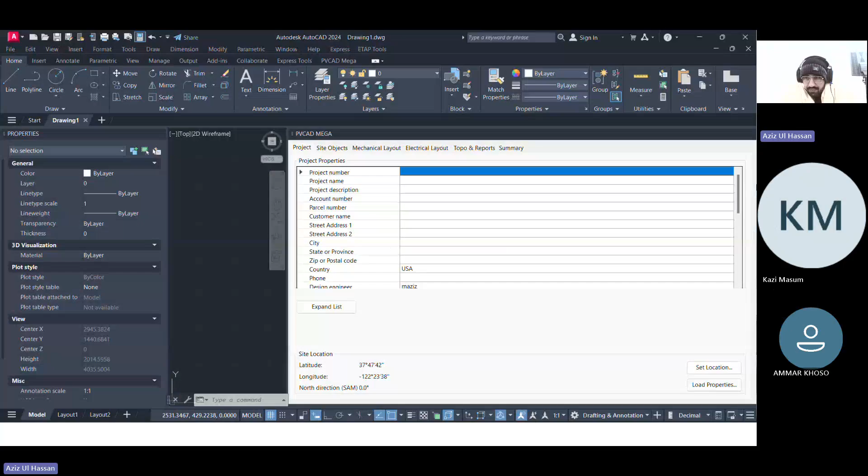So, starting our lecture, I'm sharing my screen. That is the new file. First of all, I am going to the file and saving that file.

Now first of all we set up our units. We are setting the unit in meters, decimal, 2 digits, and then we press OK.

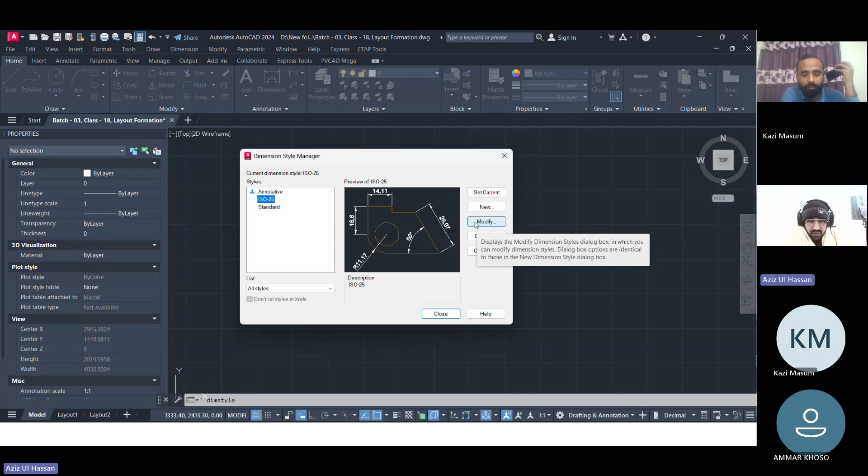Then we set up the text modification standards. If we do these modifications, the text height should be 2.5 standard text size. We are going to set Arial height to 2.5, and then apply that. The arrow should also be 2.5, then close this height setting. So I'm pressing okay.

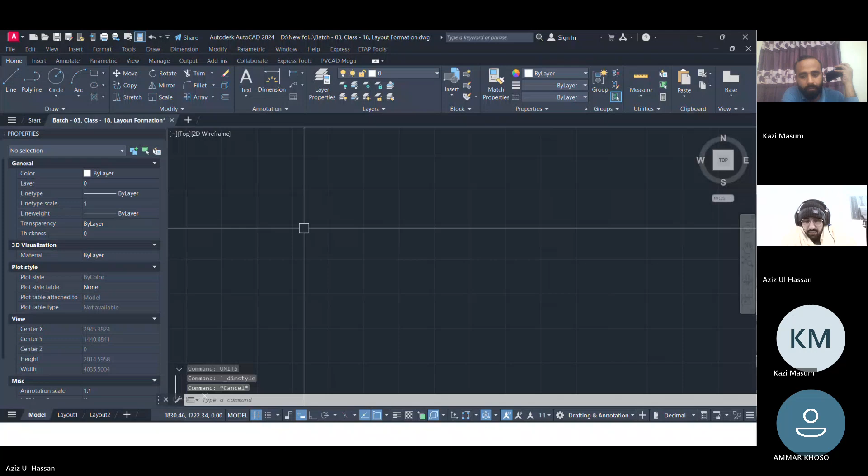Now I have just marked a layout, like here, like here. Basically, just moving that one right there. Now we will make a proper layout in that closed boundary.

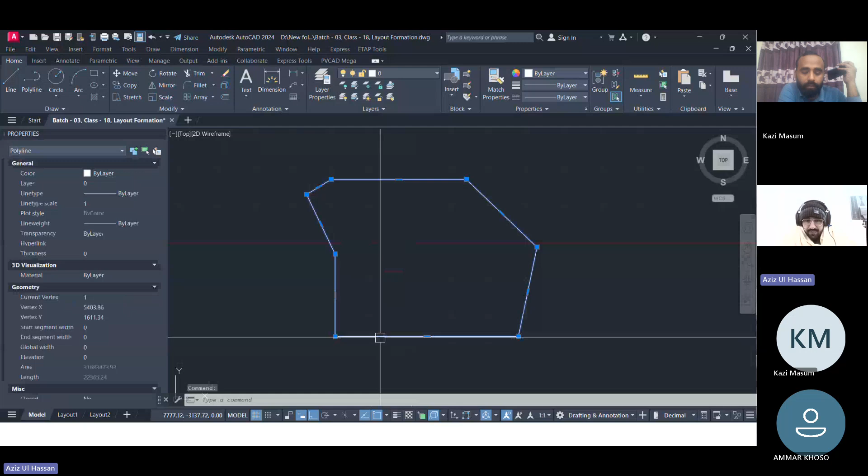So first of all, we have to give the offset for that working. We give them a 10-meter offset. Let's use DLI, DAL for that. DLI. It should be 10, okay.

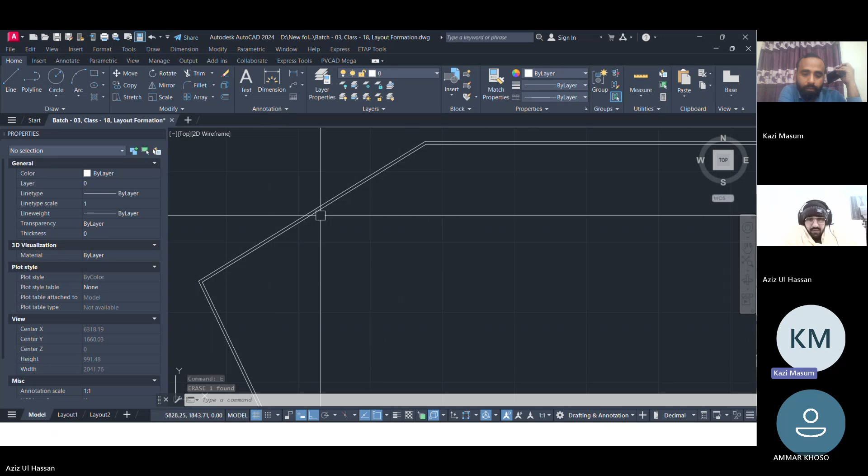Now first of all we give them an offset of 15 meters for safety purposes. Now we are making a panel, rectangular rectangle.

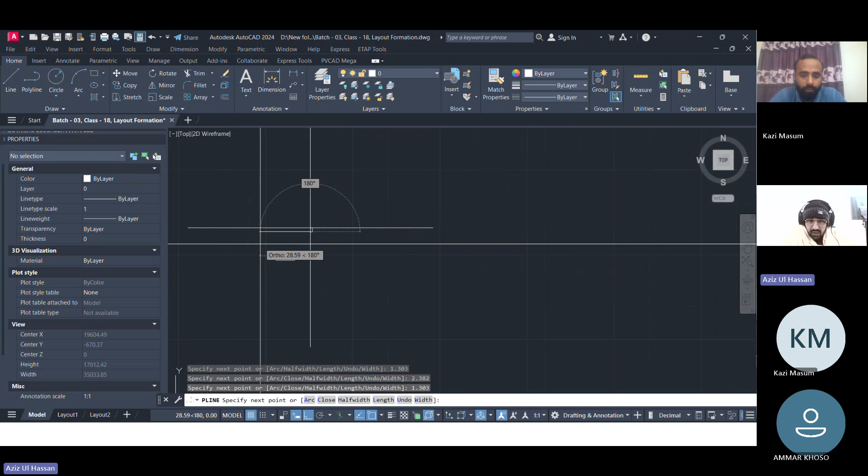I just want to check one drawing unit. So we are making a layout, sorry, one panel. First of all, width should be 1.303, and length should be 2.382 meters, same 1.303, and then I have to close that one.

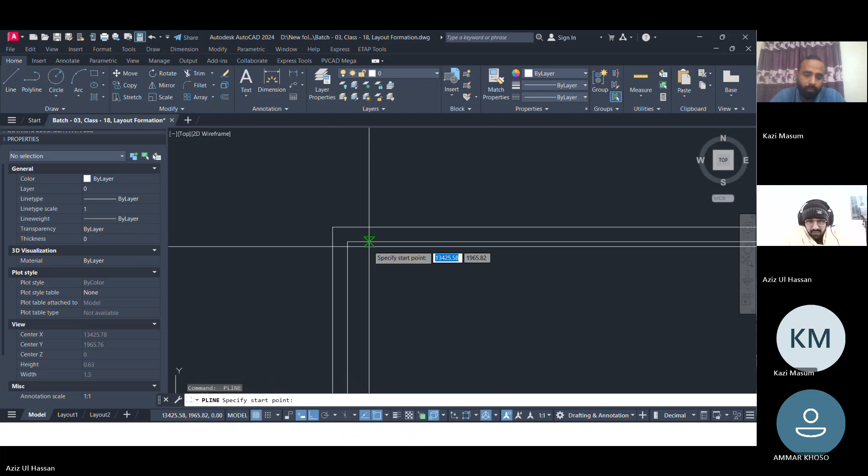Now I'm giving them the offset of the thickness. Thickness is 33mm, so 0.033 offset. Placing that one, and then this one.

Now I'm making a block, PV module, 715 watt. Select object, okay.

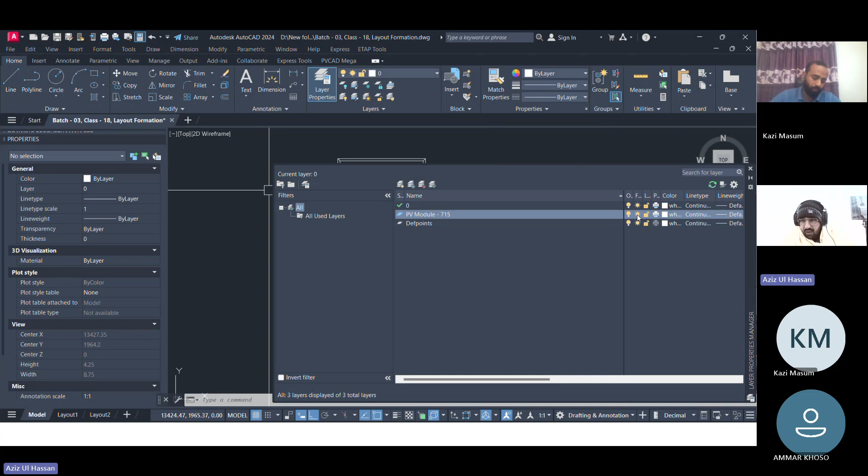Now you have to make a layer for that one. First of all, you have to make the layer. This is the new option for a new layer. You just create a new layer, PV module. Basically when working in the layer, when you uncheck that one, the whole PV modules or anything in the same layer, it should be like this. Just give them 150.

So here I just select that layer and then we have created that one.

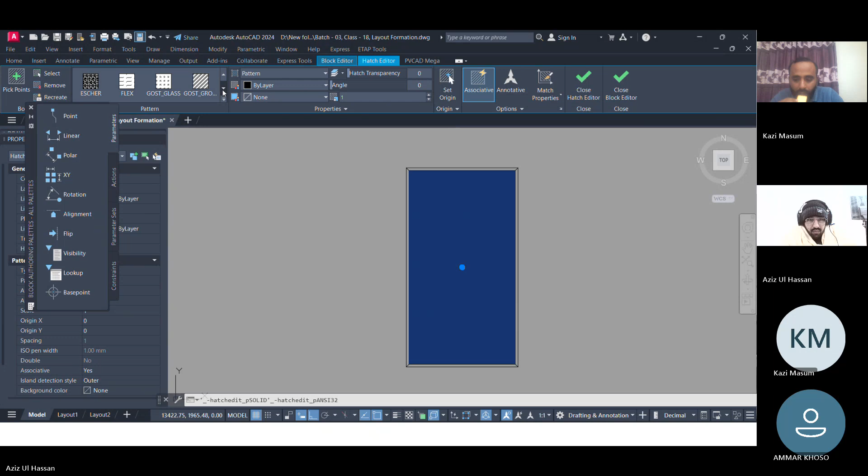But I want to give them the hatch under that one. This is the hatch, 5. It should be like 0.00. No, no, we have to increase that one. Okay, it should be like 50, 10.

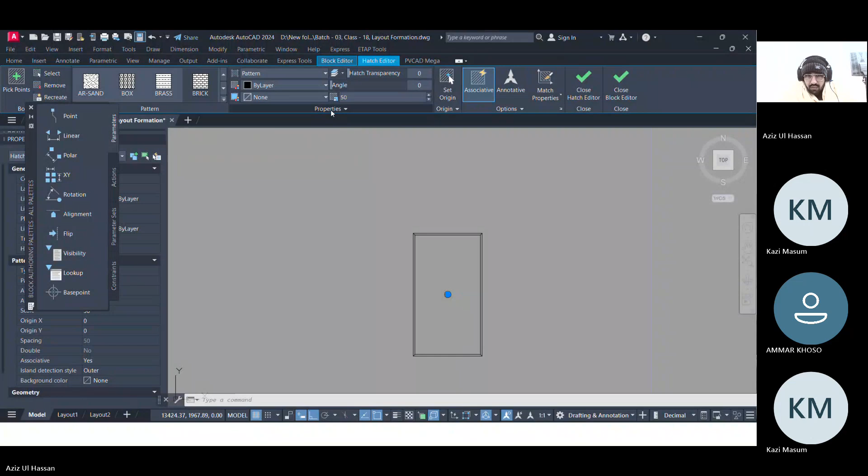Where is the hatch? No, it should be 0.01 like this one, or it should be 0.06. Okay. So we are just selecting the layer under that one and close. Okay, now it's become the panels.

Now we are moving that panel.

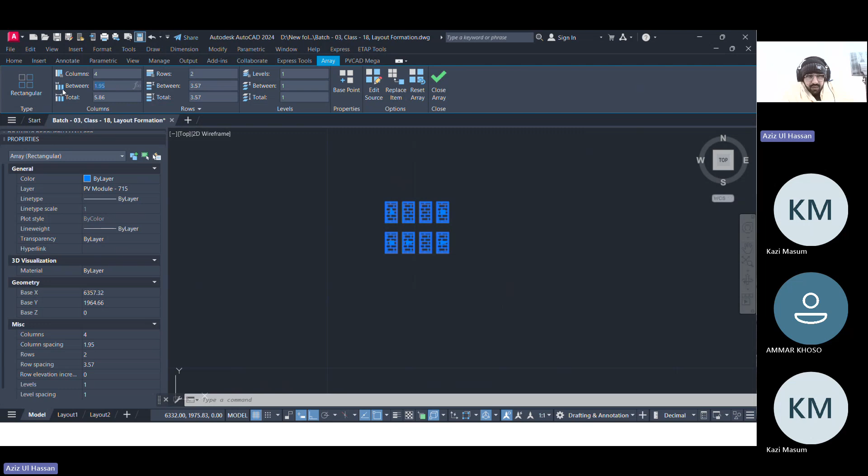So we have to make the array command, rectangular array. Here we just give them the two rows. This becomes 1.329, and this becomes 2.382 plus 0.026, which is 2.408.

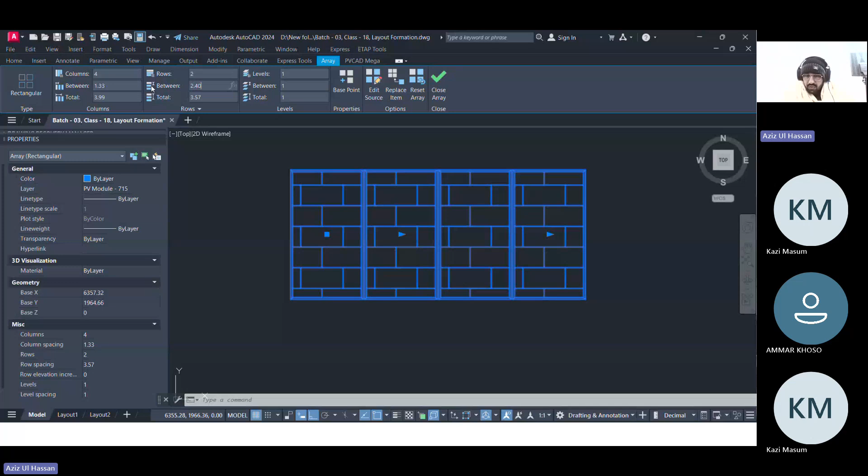Okay, now it's become full structure. So we are making a layout of 28 strings structure. What is the length of that one? Too much small. Yes, 5 point.

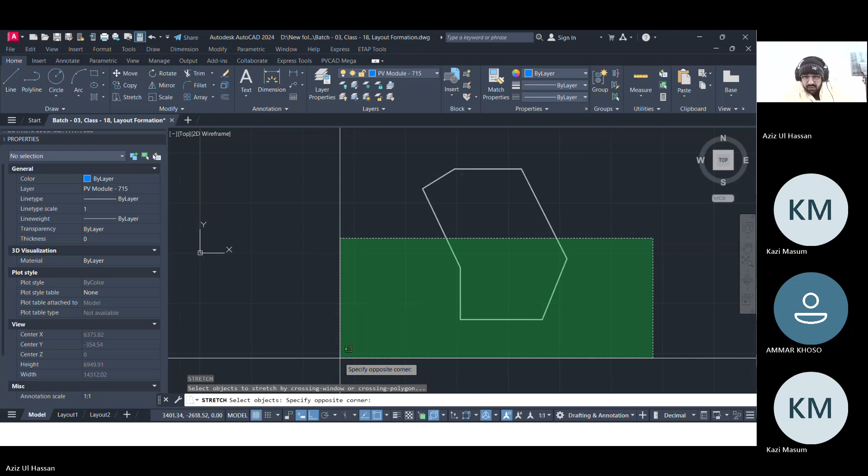So we just have to stretch that area here, and then stretch that area because as a practice, we are using that one. So that is why I just want to. Okay, now it's okay, it's too much.

So it's 28 PV modules: 3, 4, 5, 6, 8, 9, 10, 11, 12, 13, 14, 15, 16, 17, 18. Okay, now it's 28 PV module structure. So we have to place that structure like here.

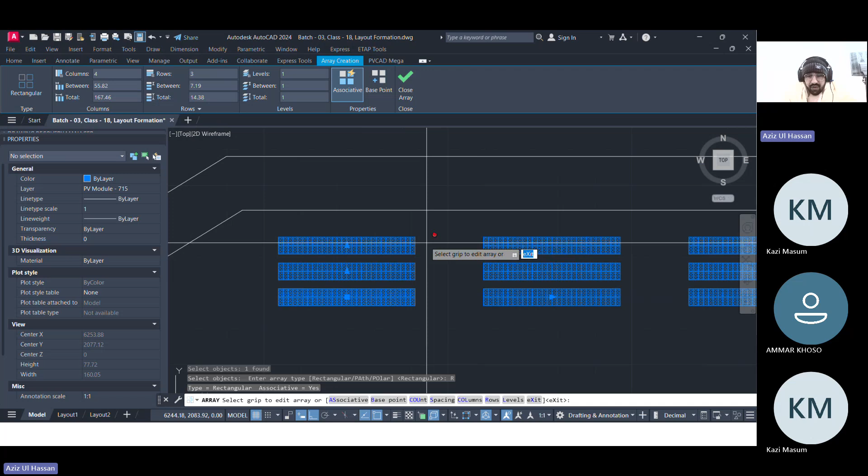Now we have to make an array, rectangular. First of all, we have to save that one because maybe in array our computer will... sorry, rectangular. Now I'm just giving in between. First of all, I need that length from this edge because we are...

37.21 meter plus 1 meter, 38.21. And we just give them this length should be 38.21, and this should be minus 10.

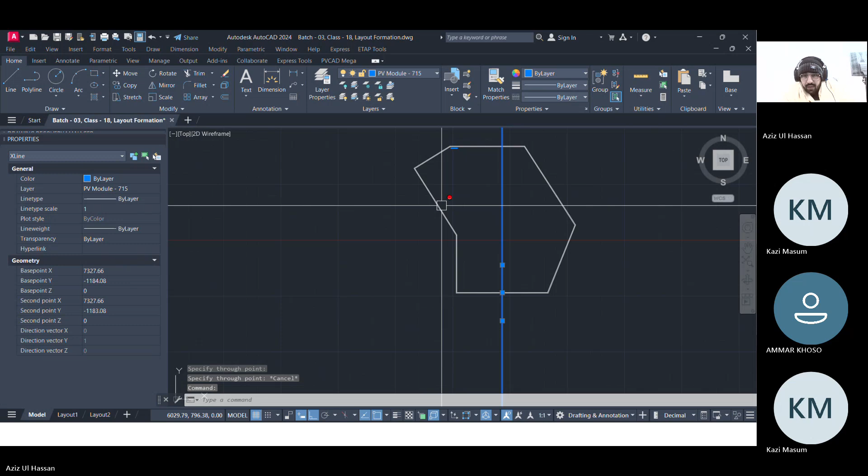Okay, so here we have to give them the road. We are XLine vertical, we are just here. We have one road, so offset we give them like 10 meter for the road purpose.

And then we are making some road like here and some here. Okay, here I just give them the offset of 21 meter, and same like that one.

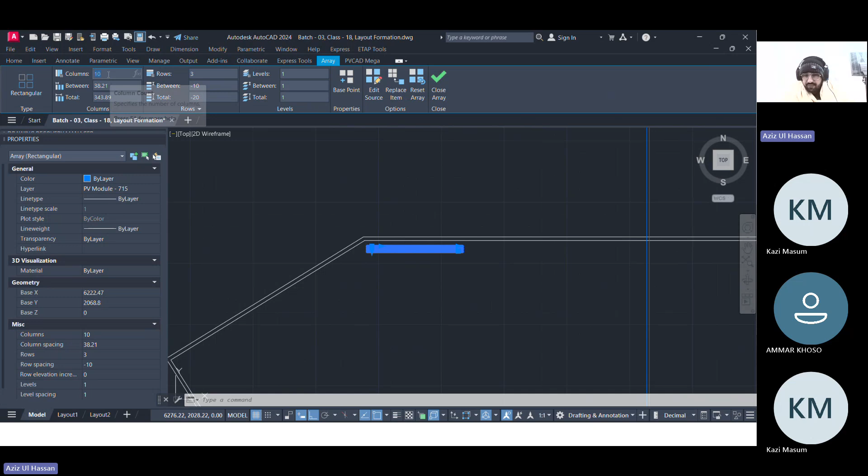Now I'm just placing that panels, and I just give them this row around 4, 5, 10, 15, 20, 30, no, 28. Okay, 28s are okay. 29, 29 is okay I think. Okay, 29 are okay.

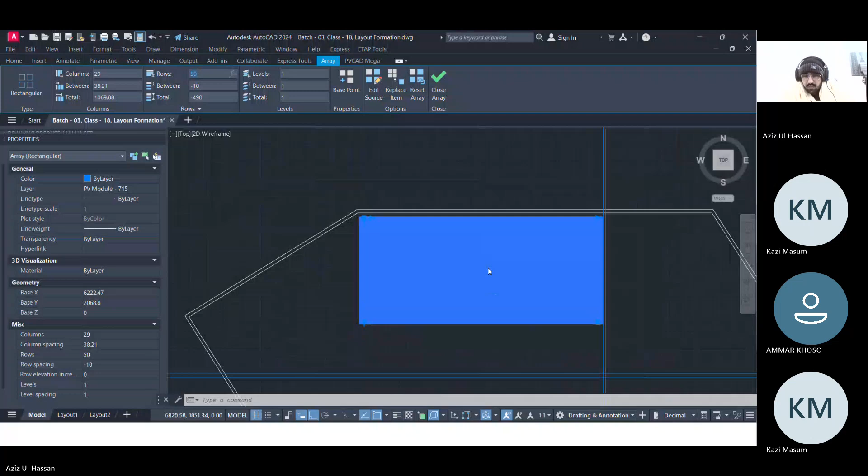So now we just explode that because they are creating too much issue. That is why I have exploded that one. Okay, now it's okay, basically.

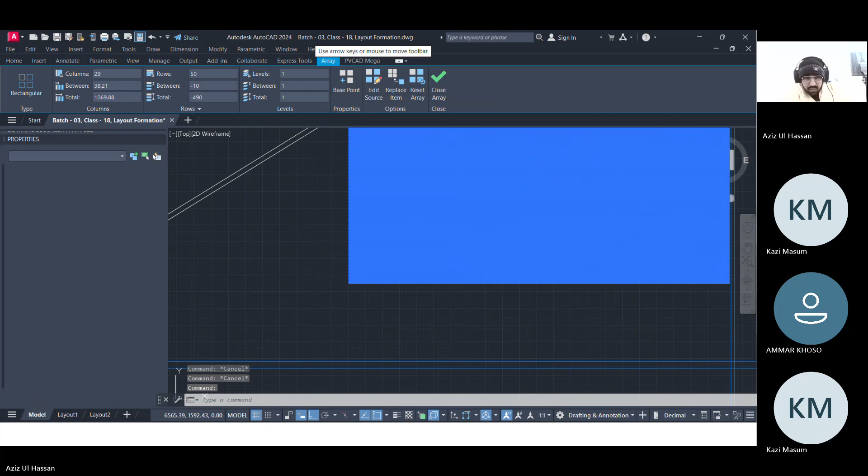Now I'm just copying that one like here. Here you can see that we have created a proper layout.

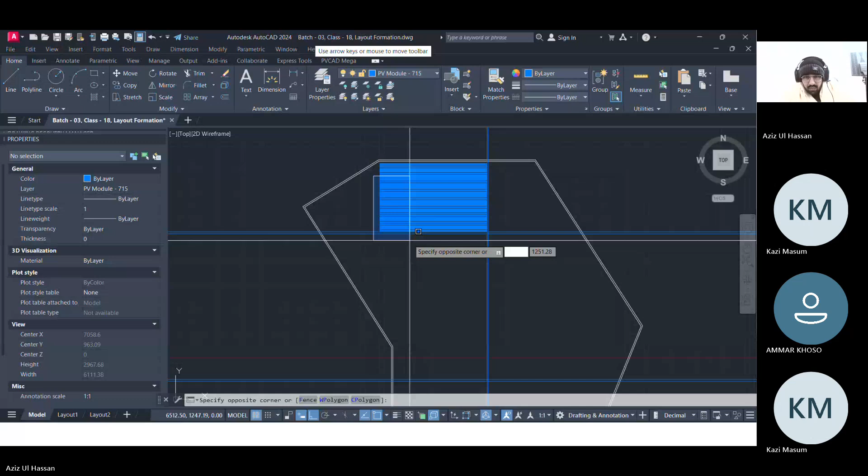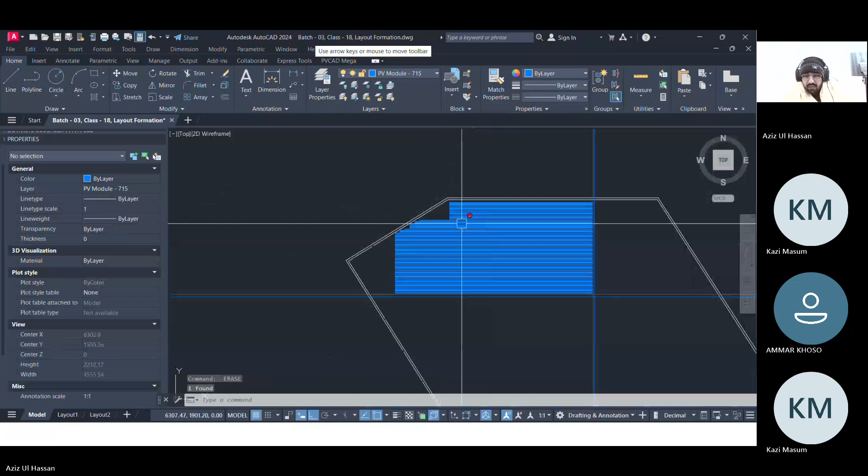Mr. Kazi, have you used PVcase before? No, sir. Kindly try that, it's very good software. Okay. Sorry sir, I missed your voice. I'm saying kindly try that in civil prospective, PVcase. Okay sir. It's very good for the civil prospective. Okay sir, it is a paid one, but as a businessman you can purchase the crack version. Okay sir, because you are the businessman. Sir, all businessmen are not rich. Inshallah, one day you will become rich. Inshallah, sir. Inshallah.

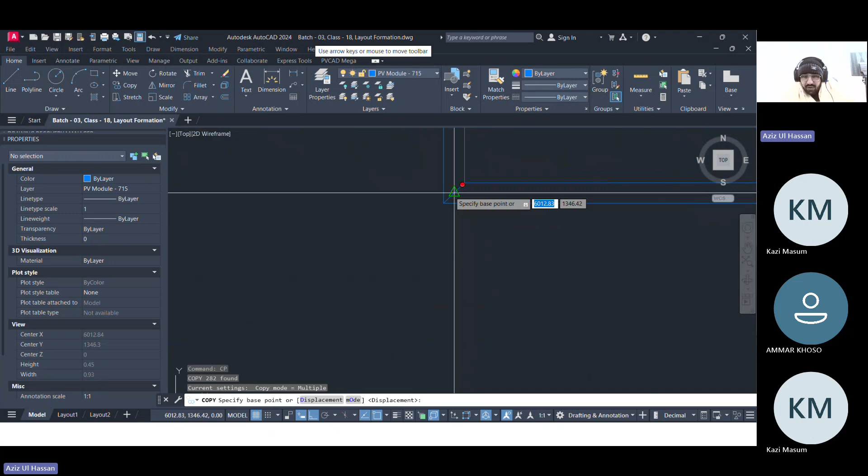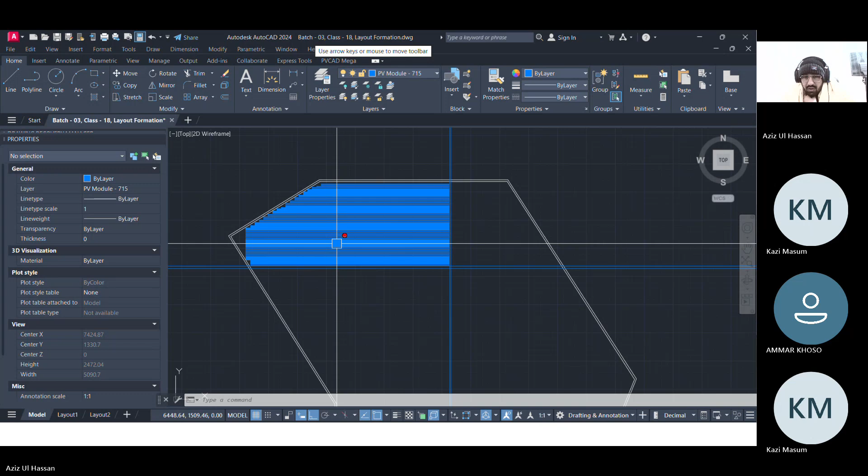How much project have you won right now in civil? We are working in small scale projects normally, these are 10 kilo, 20 kilo, 14 kilo. At the start of the project it is very good, meaning at the start of the company it is very good, yes sir. Actually in our country there is a government rule that to install any kind of utility or large buildings, it is mandatory to install solar panels. Okay okay, that's great. So in your company, solar has a very good future right now. We don't know, it will depend. Many things depend on the political situation. Ah yes, you are right, yes you are right. It is very too much unknown situation right now in different countries and scenarios.

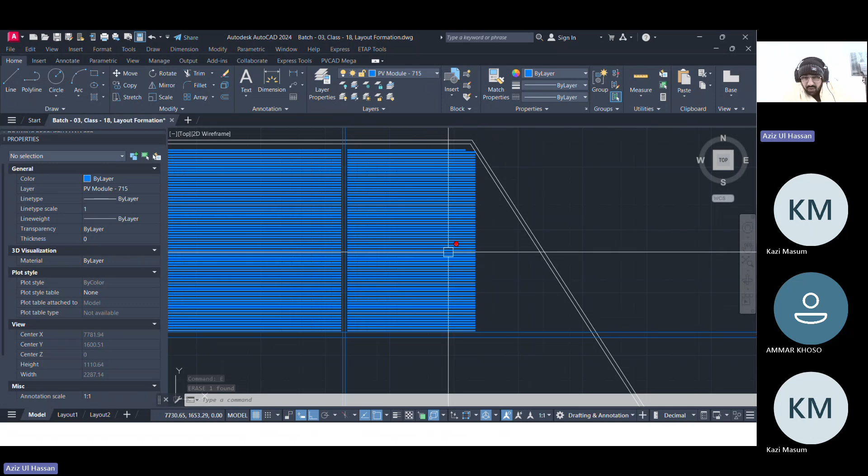So I'm just copying that file, because I can use the array command as a reference, but this project is too much large, and they are creating issues because in my computer the C drive is almost full due to some data. That is why it is creating issues in my laptop. So just for the understanding purpose, and to show you how we will prepare a proper layout, I'm just copying that one.

Sir, will you please show how we can calculate the DC cable lengths from this? Yes, yes, DC I will show. I will show, no issue.

I will show everything, brother. No issue.

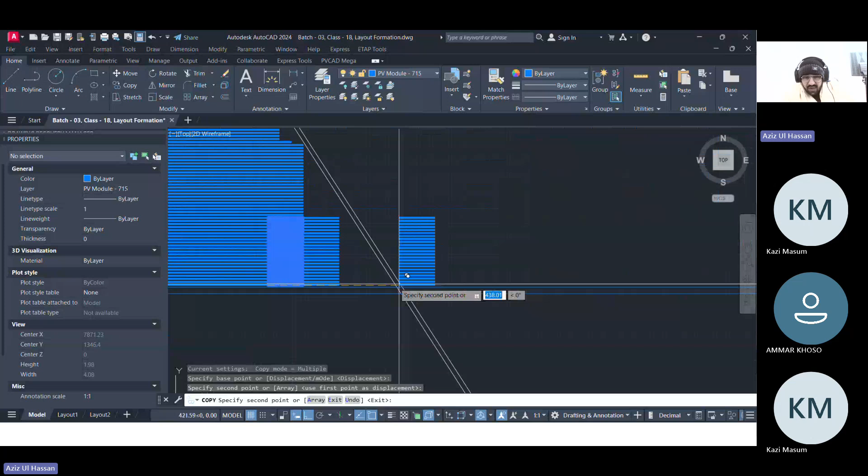Mr. Kazi, are you satisfied with this course? Obviously, sir, it's out of my section actually.

That is a very good sign for me, because when the client or the student is satisfied with your services, that means you are doing the right things. So you should continue the course.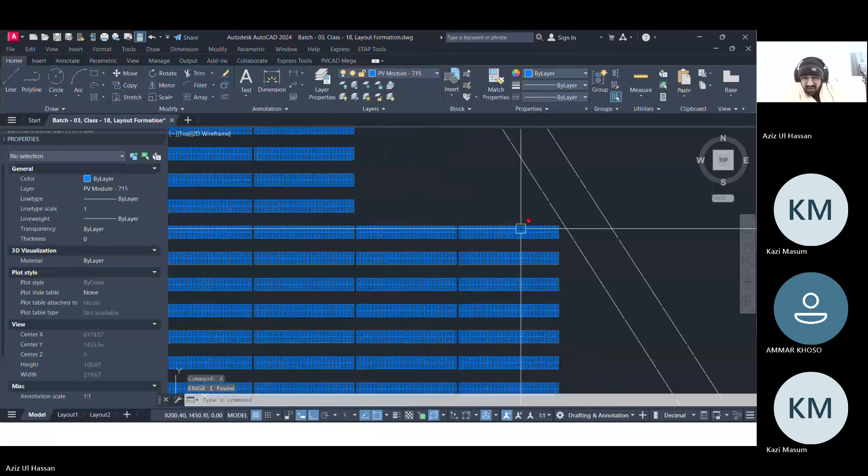No, no, brother. Basically I have some issues, and due to that course my family will be too much affected. My exam will also be affected through that one. So that is why I have to discontinue that course.

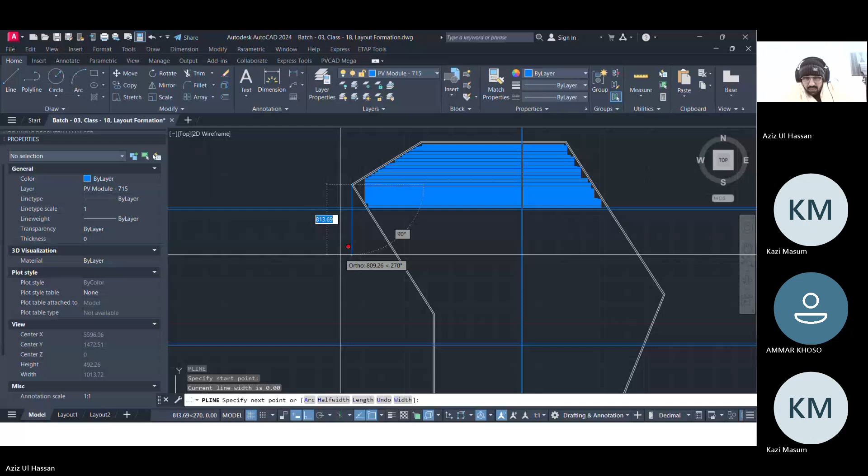So right, guys, as a purpose I have just prepared one layout. These small areas I'm just... and right here... we just make PL from that options...

So that is why please continue this course. I know people need that course, but I have some issues. Basically my health is creating too much issue, because when you are providing these courses you have to fix your timing.

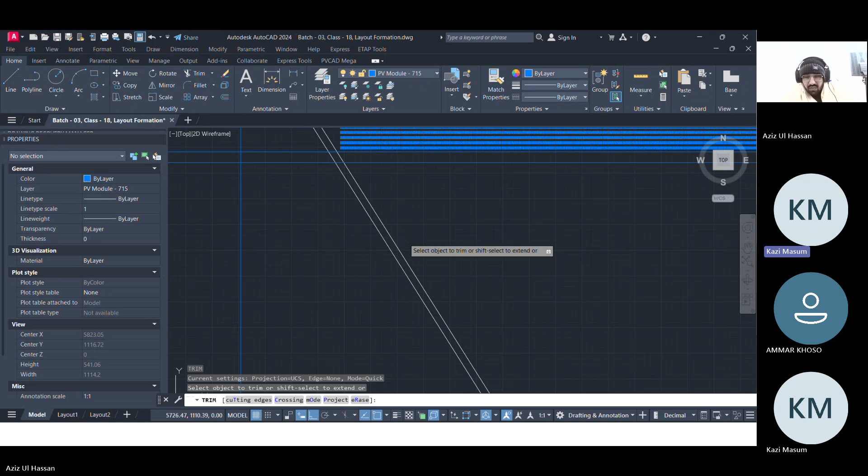AutoCAD is creating too much issue. Sir, make a smaller plant. For teaching purposes this large plant I don't think is necessary. Make a smaller plant, but yes, that is why I'm just deleting that one.

Just deleting that one. Mr. Kazi, I just want that if you are paying, you can see how we will make the large scale layouts. That is why my purpose is to show how you will...

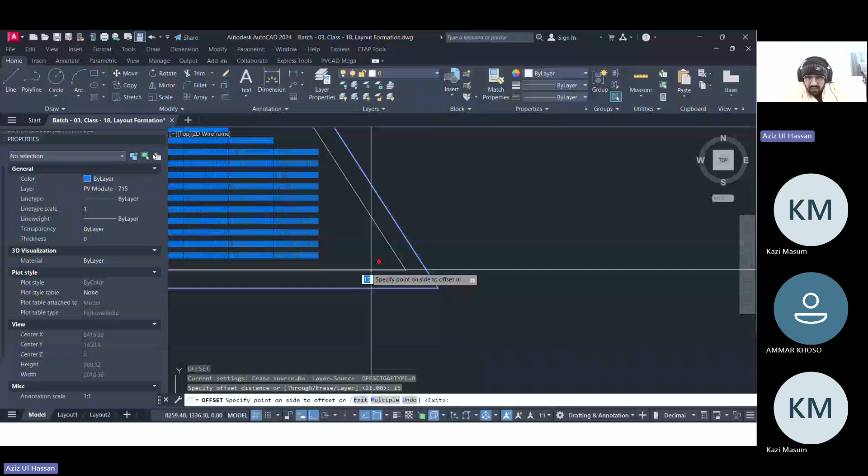Just giving that 15-meter offset. That is the main reason. That is why I just create too much large layout.

I know I don't need that one, but it is my responsibility. I am just feeling that it is my responsibility to show the things properly to everyone. Okay, yes sir, that is the main reason.

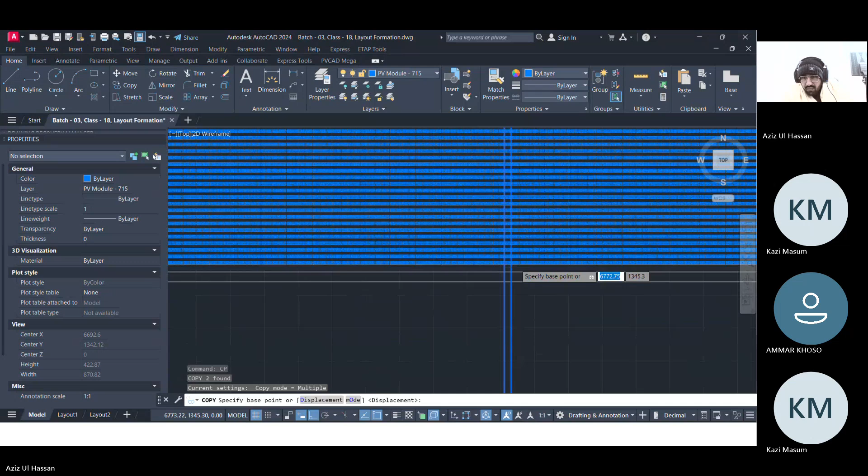Because, brother, basically my purpose is that I'm not here for money making. I'm here for people learning, basically. I understood that, sir.

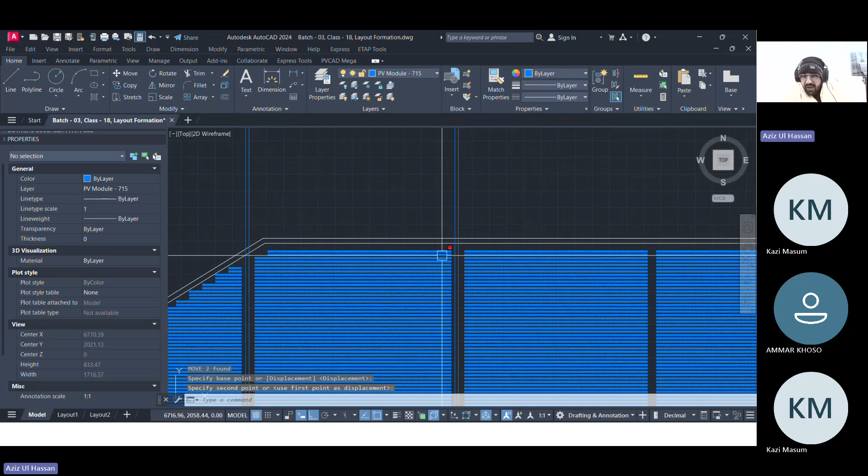When we started the company, the first time, the knowledge was very rare in our country in this field. You know that only five people were in that course.

Only five people, but I had committed and given the advertisement of that course. That is why I just started the course, because Mr. Greg was the first one to pay the course price, and I know he paid me.

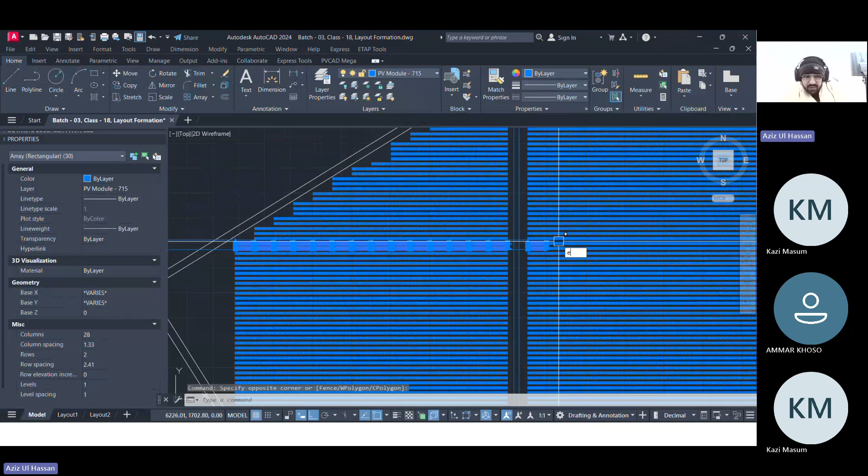My purpose, that is why I just felt that it is not good if I discontinue. That is why I started the course, and I just delayed this course for around 2 weeks. That is the reason because I was not feeling good at that time.

In the previous batch, when I was delivering the last batch, at the end of the course I was almost off for 1 week, and after 1 week I just extended my course for 1 week because my health was not in a good situation.

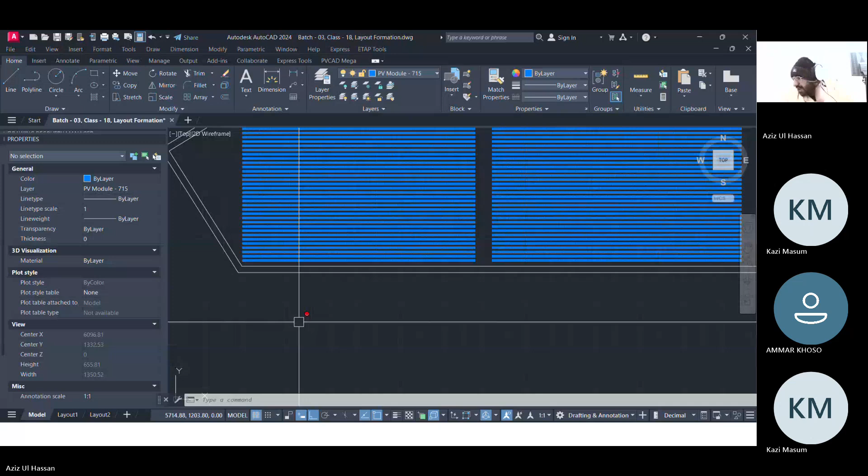So that is why I'm here for that purpose, because I had already advertised the course. That is why I just started the course. That is the main reason. And also I committed to you because you requested me not to discontinue.

Sir, I am an optimistic person. My first project after registering the company came after 8 months.

Okay, okay. Inshallah, in future, inshallah, in future you will be getting more and more projects, inshallah sir.

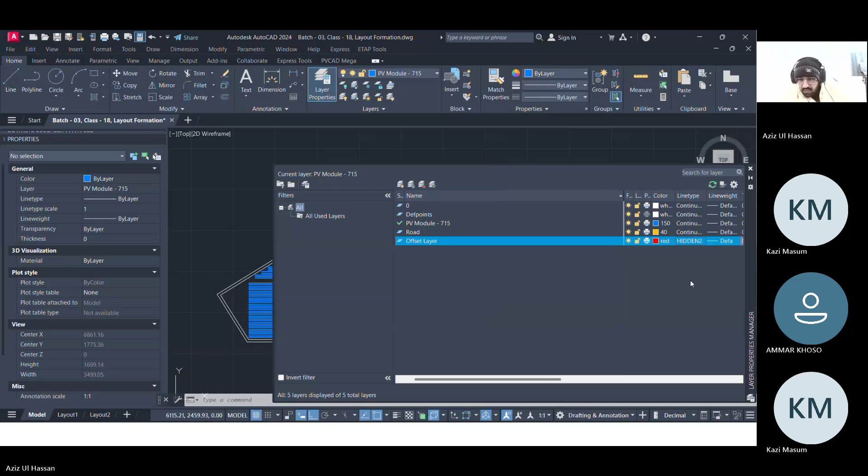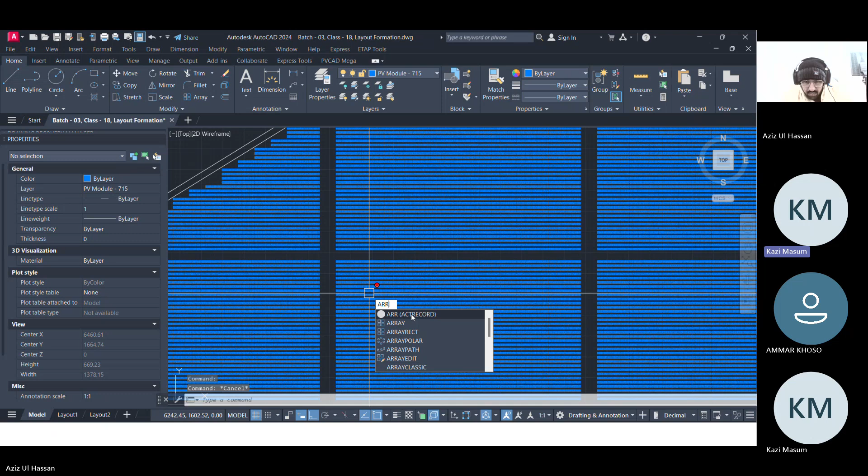So I just set the layers. Now I'm making... so I'm just making the layer, the roads, XL for this one, offset of 5 meters in the center.

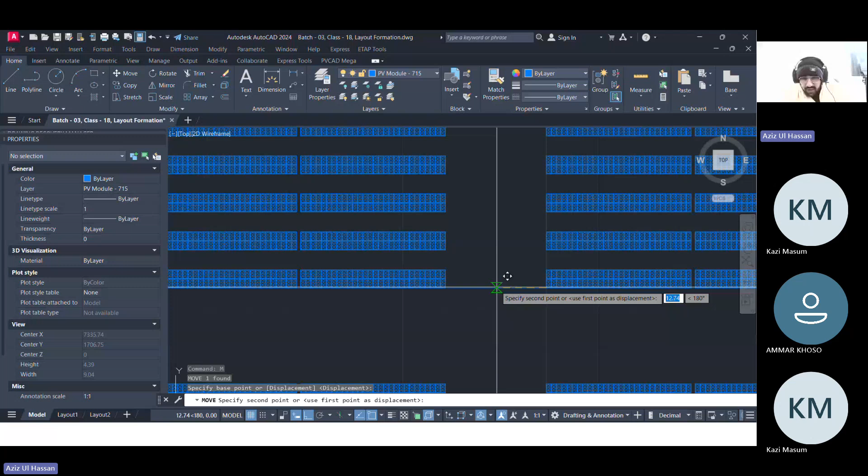So total XL... DLI, I'm just checking the length, 25 meters. So it is around... this is like center. Now I just give the offset of 2 on both sides.

Then I just give them the offset of 1, because when we are doing the roads, we are preparing one complete rectangular command.

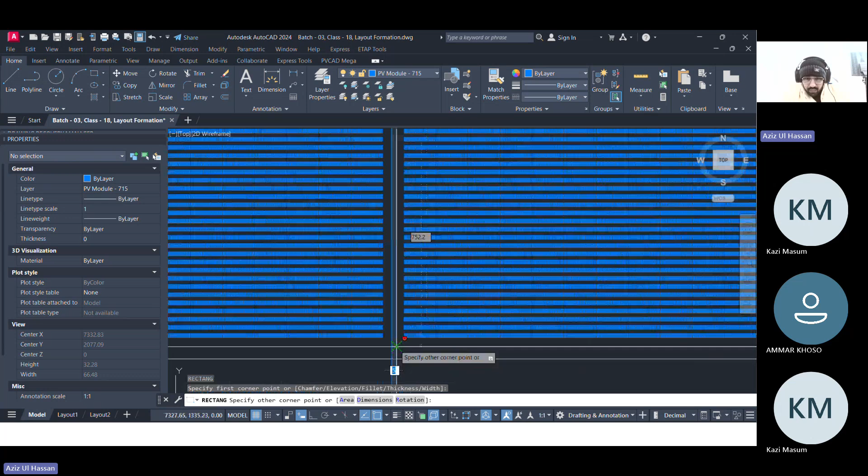Now I have made them as a road, polyline this one as a road, and one rectangular offset of 1 meter.

Okay, now I deleted that one. Here I have just converted it into the road layer, but this should be the offset layer.

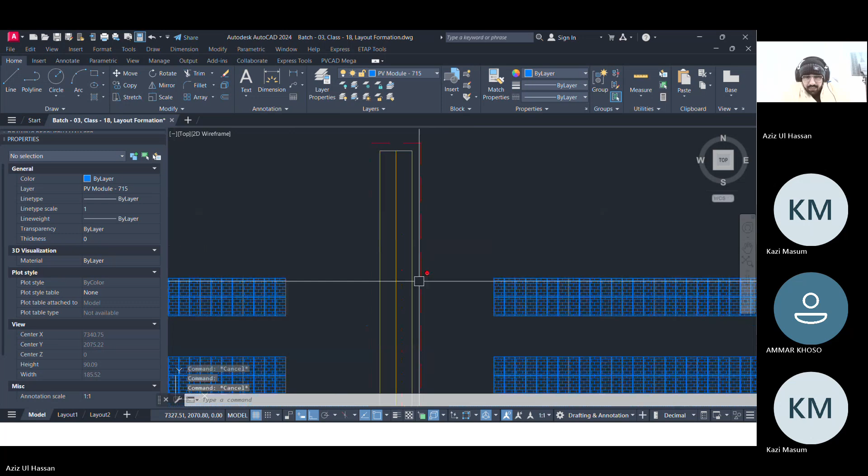Now I'm just giving the global width like 0.1, no, 0.2. Okay, this is 0.2. Here is the road midline.

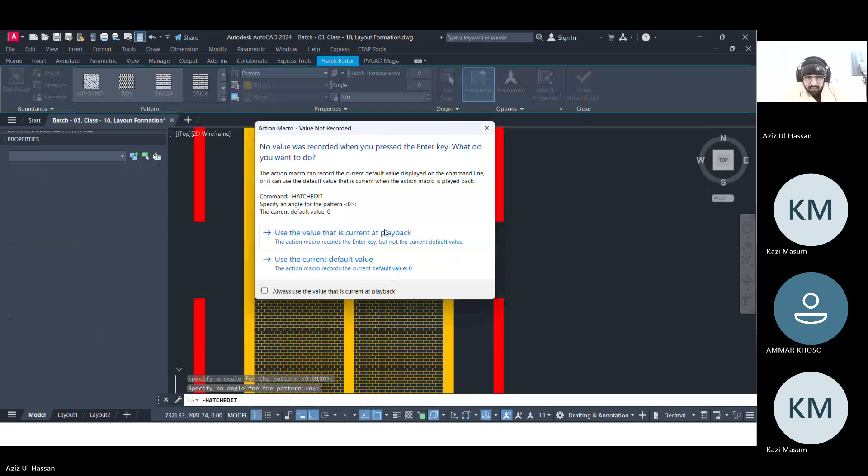So I'm just giving the hatch as a road. You can use the fixed one, but I just give them a green one. So this is the road which I have made.

Then copy that one, and from that center we just move that one here also.

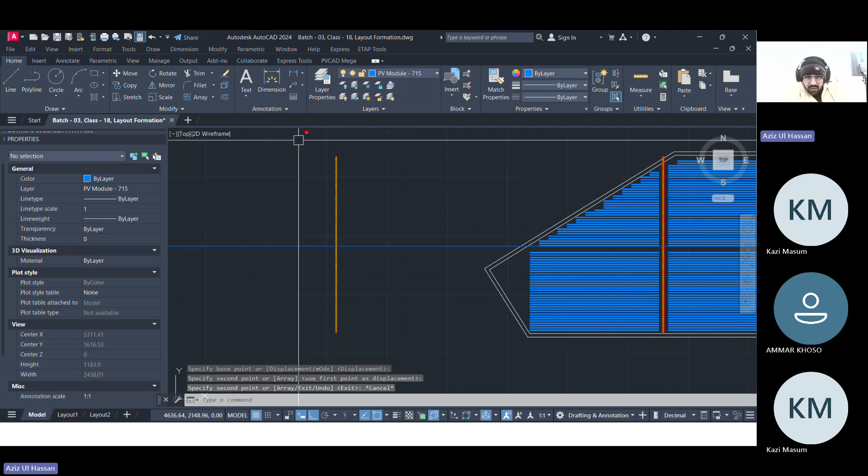Now we copy that one, take it outside, rotate, RO for rotate, in the center line, 90 degrees.

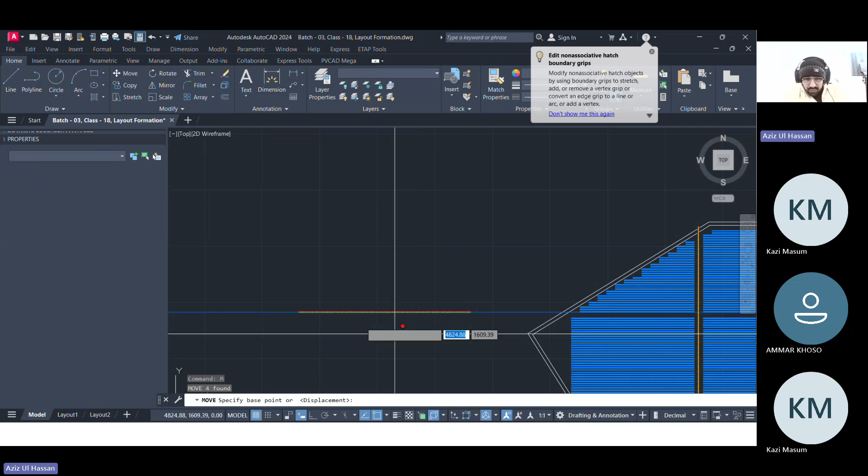No, you have to move that road in the center portion. Now you have to stretch that one. Stretch. Okay, like here.

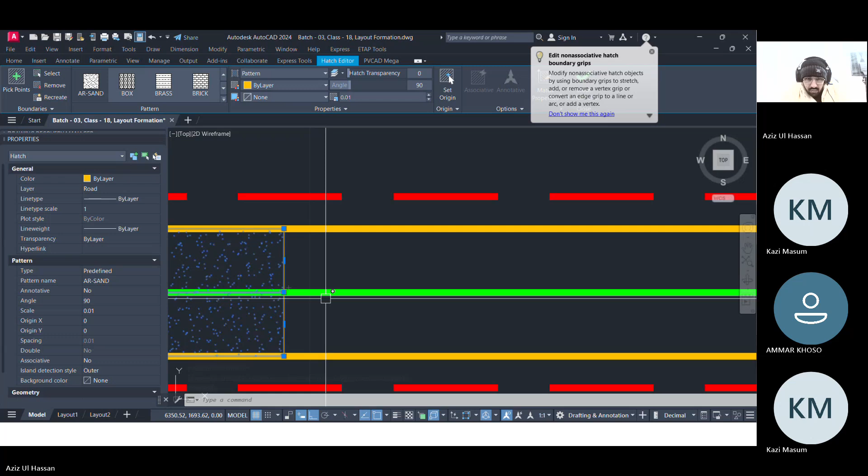So here I have just deleted that one. Hatch again. And this is the match command which we have used already - MA for match properties. So I just give them as a match command.

Now these roads are prepared. Now we have to prepare this road. We again give them the offset of 5 meters, like 2 and 3, 5 meters.

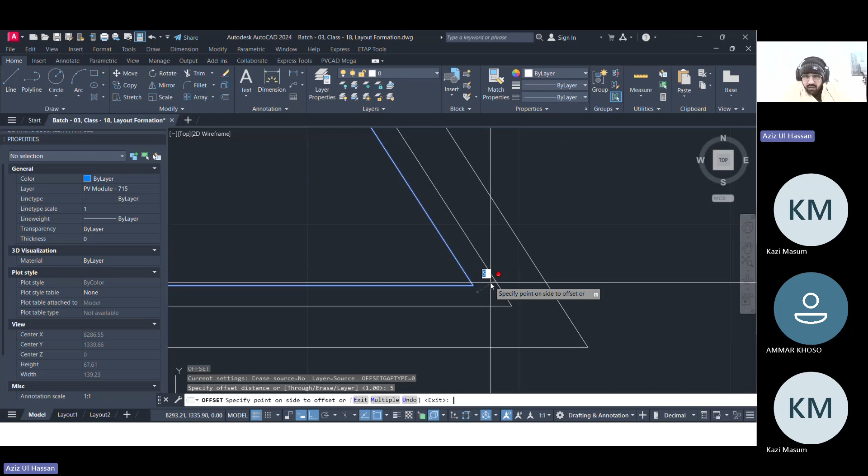Now I have just given them 2 meters for both sides, and also the offset of 1 meter. 1 meter is basically the collar height of the roads.

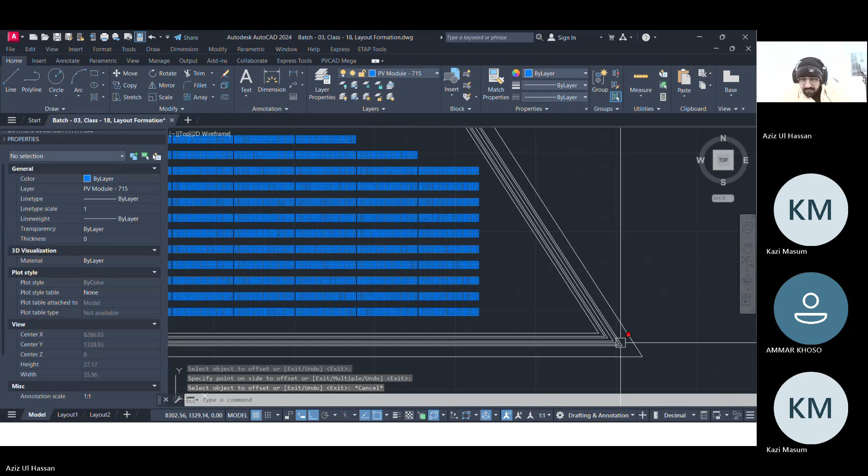These should be converted into this offset layer. Hatches should be like 0.2, and these should be converted into the road, but color should be green. Global width should be 0.2. This should become - now I am not giving the hatch in that one, but the purpose is that it is the road options.

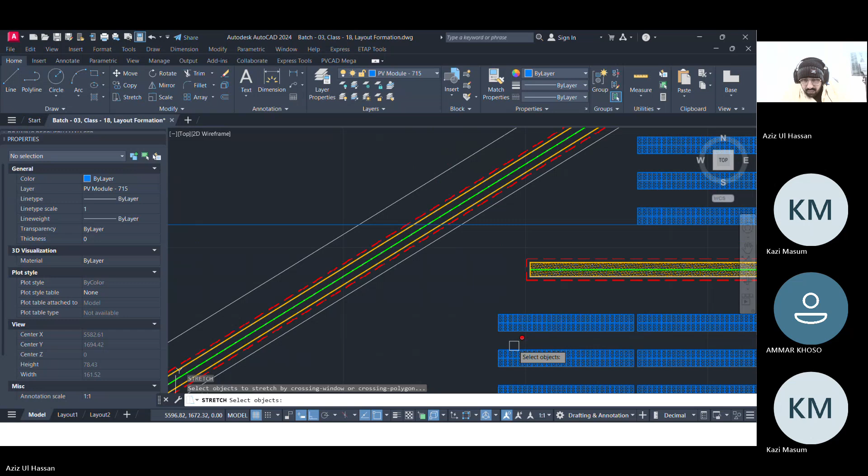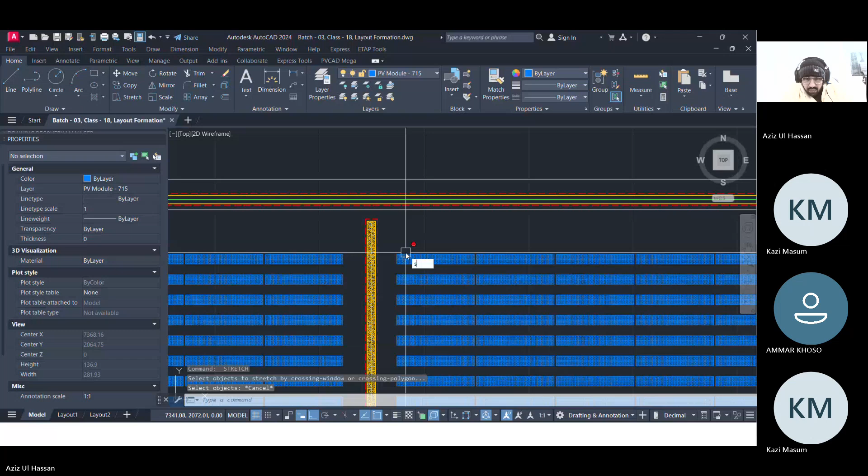Stretch that one. I just stretching, no other thing is the reason.

So here is just the layout which I have prepared. This is the area, like we make a rectangular for the substation area. Here we just give them this, this is basically the fence line.

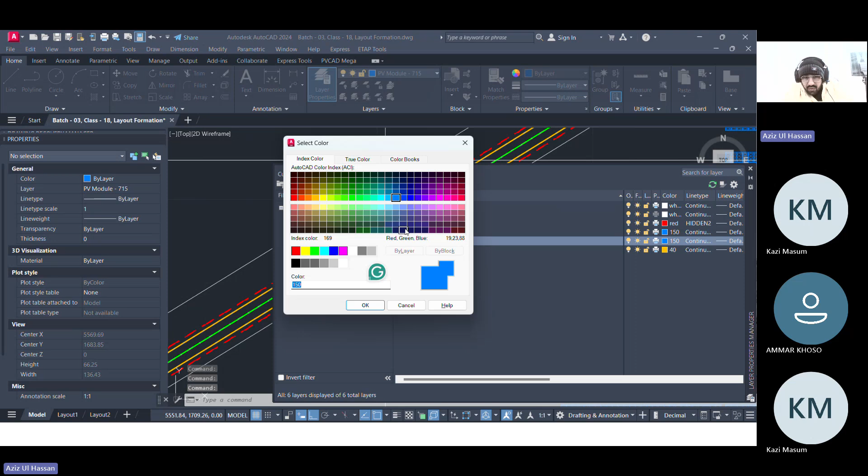We make a fence layer. Color should be blue, and this should be fence lines. If we check, there is the fence line available - this is the fence. So here we just convert into the fence.

Now we give them the road option, gate option. So here we give them one road, gate option there. So this is the layout. Now we just make a printing sheet.

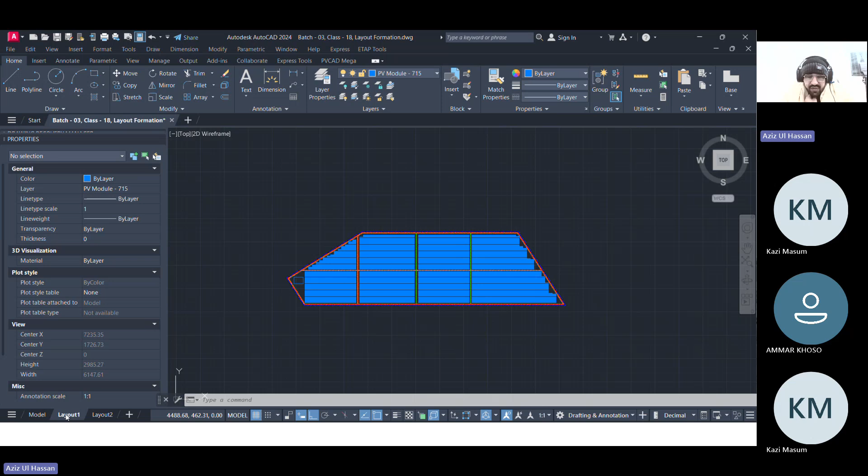Mr. Kazi, basically today's lecture is going too lengthy. I will tell you the length calculation by tomorrow's class. Okay sir, okay.

Now I'm setting the page. This is the ISO full bleed A2 page size, we have set that one. I just delete those options first of all.

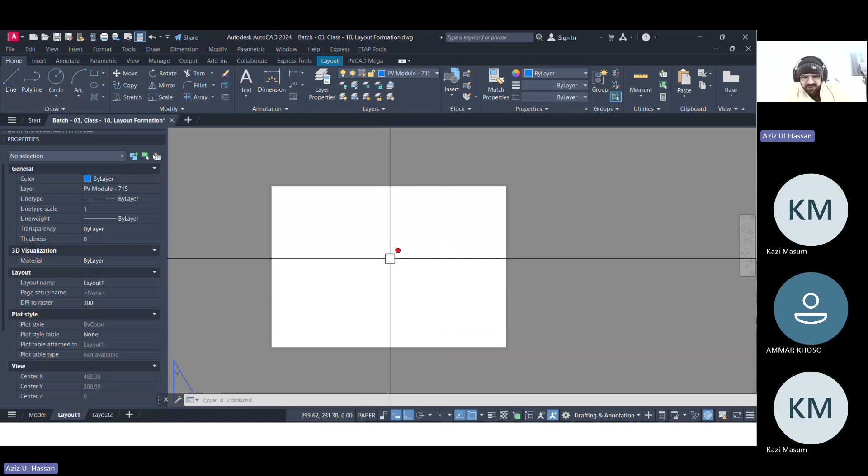Now I will make one, like MV command. MV - like here, I just set an MV command. Now this becomes in the zero layer.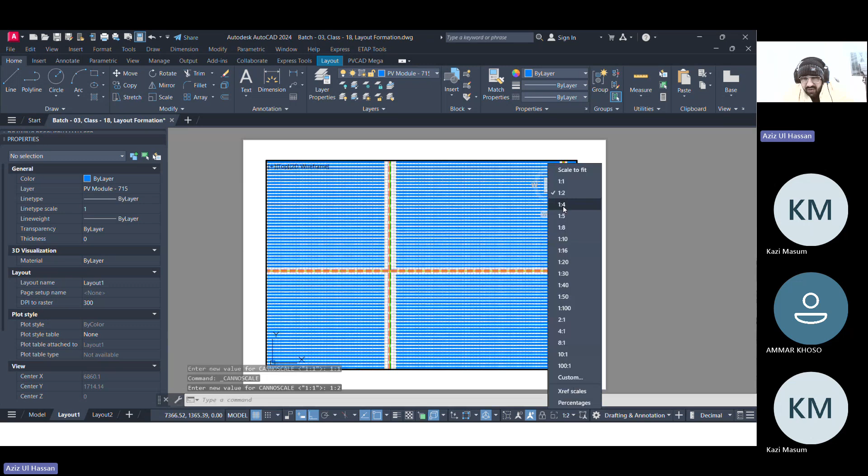Now when you are working in that, you have to set the scale of that one. If we set that as 0 0, you can see that on 0 0 they are not setting up. Now you have to check again. It should be set up at like 1 by 4, 1 by 5, no, 1 by 8. Okay, it is around 1 by 8 or 1 by 5. If we set up at 1 by 5...

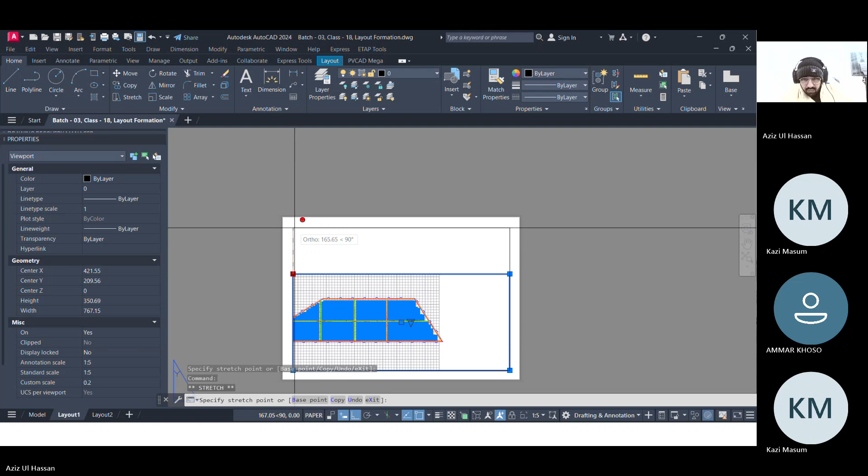If we increase the size of the page - modify, A1. No, it should become 1 by 4, the best option there.

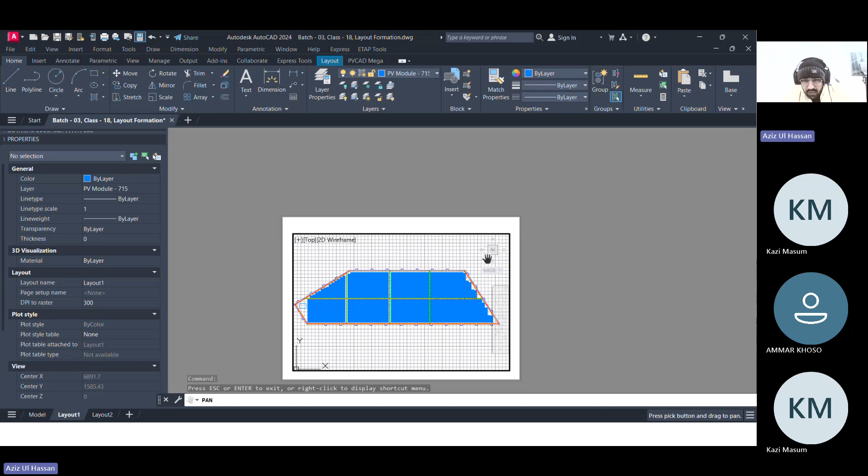Okay, now you have to decrease this MV port. No issue. You can lock that MV port. This is this one. Now if you double click, no change, but if this is not locked, it will go inside.

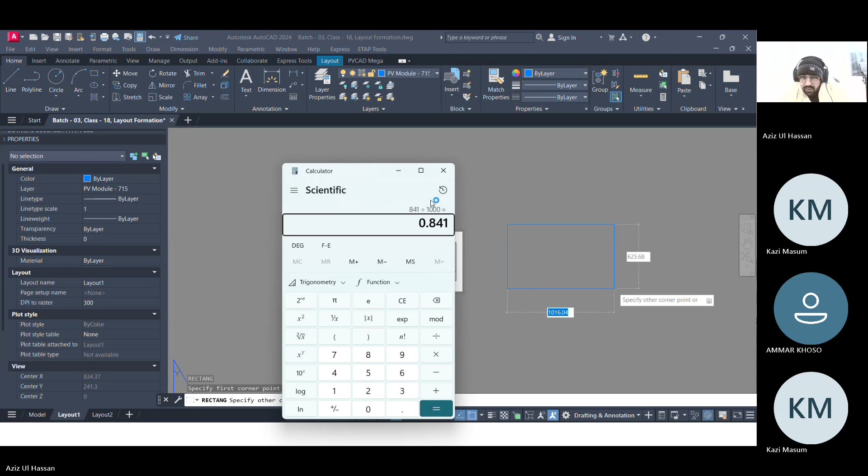Now I just want one rectangular in which this length should be like in 850, 0.8 meter - 841 divided by 1000. This should be 0.595. Yes, this length should be 0.841 and this should be 0.595.

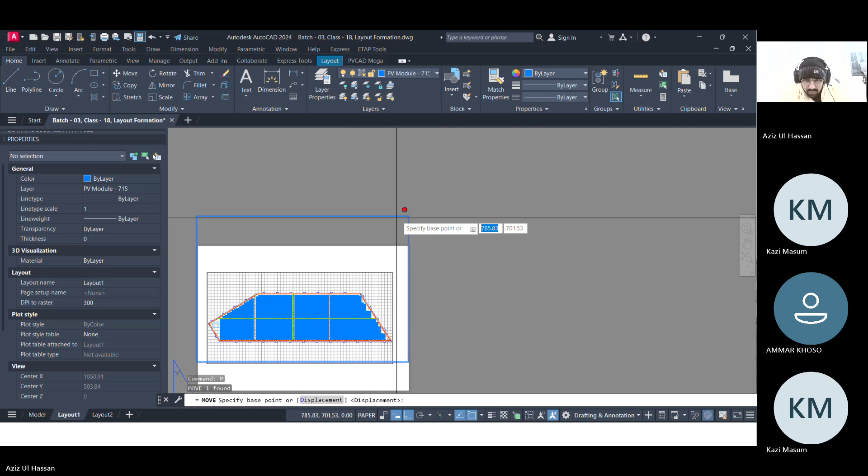Rectangular, 841 by 594 - so that is the size.

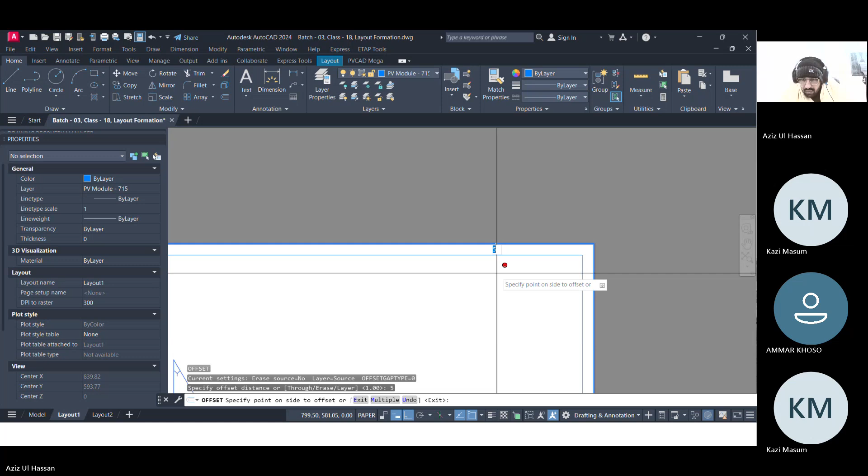Now I just give them the offset of that page, like 5 meter - set of offset. Sorry, 5mm, sorry, 10mm. Okay, I just give them the offset of that one.

Now we will make the full page. Basically I want to make a full page size, which we have seen in that. Now it should be like TL, like here, copy.

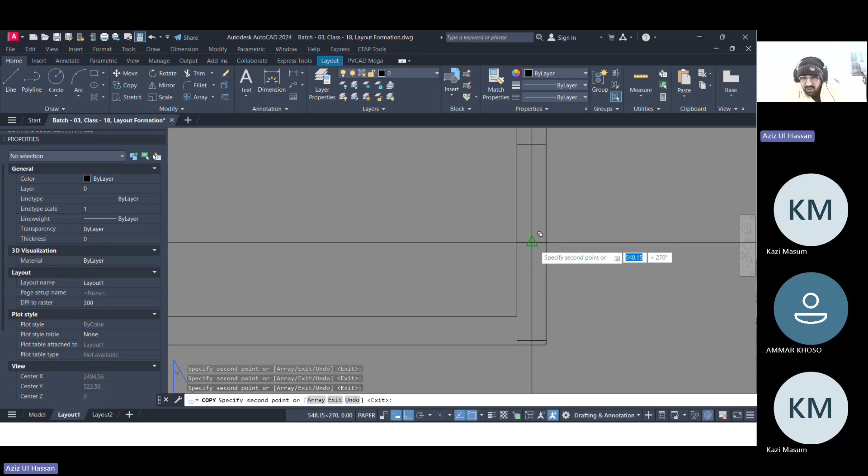I just making one page. Most of the time you have seen that in AutoCAD drawings. Copy. Okay, now we make it here.

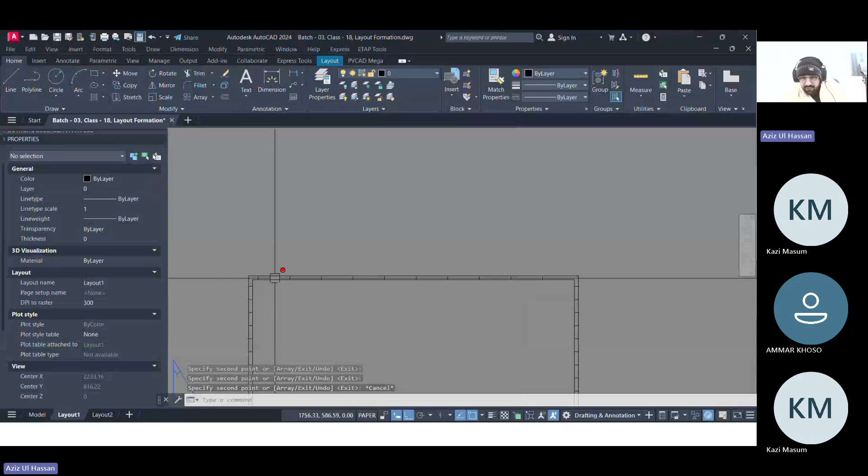Copy. Same one, same one. Same one - no, but okay, that's okay. Move it in the center. Copy.

Now we make them a block, B, A1 page. Now we place that into the bottom.

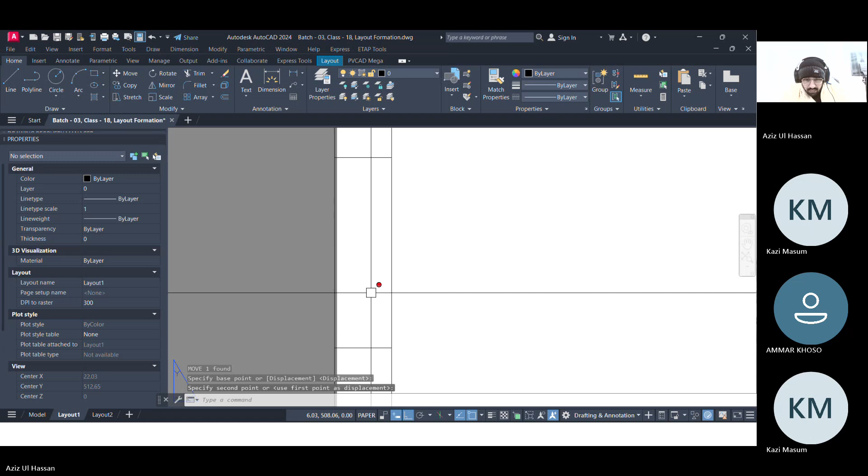Now control P, control P, preview this.

Normally hatches take too much memory. Yes, yes, I know that brother. But if you use PVcase, it will make a proper layout in PVcase options. But because it is a purchased version, not everyone can purchase that PVcase. But my purpose is that you know how we will make the proper layouts for study purposes.